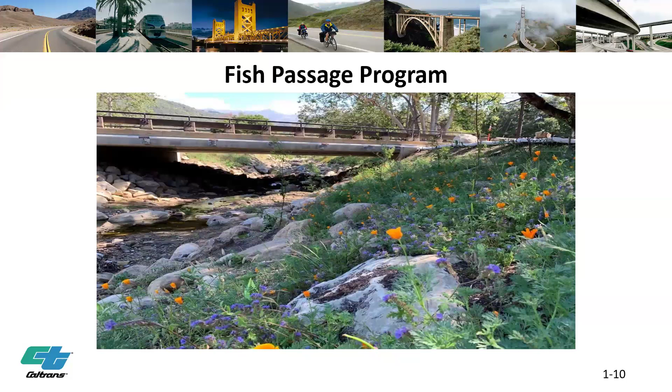Thank you. So today we're going to talk about the Fish Passage Program. Next slide please. To summarize the discussion, we'll be talking about...

The legislation that requires Caltrans to address fish passage on the state highway system. We'll talk about partnerships that were developed to prioritize and develop science and data for those fish passage barriers, how we collect that data, our engineering practices and our standard solutions, permitting efficiencies for restoration projects, funding opportunities using transportation dollars as well as federal dollars and other state and local grants, as well as the challenges and solutions to planning and delivering these projects.

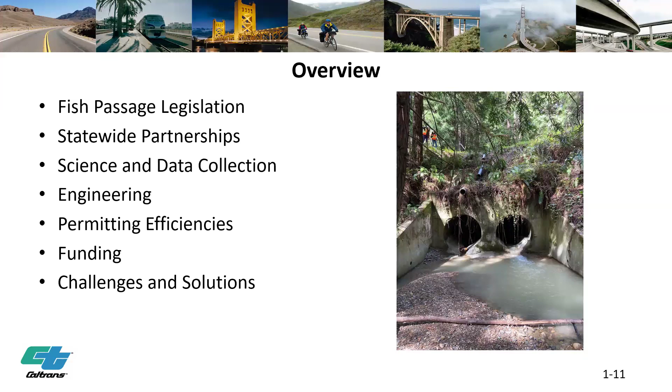Next slide please. So Streets and Highways Code 156, Senate Bill 857, that was passed in 2005 - we've been working towards the requirements of that bill for almost 20 years now. It prohibits actions that extend the service life of a barrier to salmon and steelhead on the state highway system. It requires projects not to create new barriers by construction. And there's an annual report to legislature required to show progress made annually towards identifying barriers, prioritizing them, and remediating them.

And each year, those highlighted items are priority barriers - completed remediations, projects that are active in the delivery process that are allocated, assessments taking place across the state highway system to inventory all known barriers and to obviously rule out non-barriers. And then, as I mentioned, funding for current and planned projects.

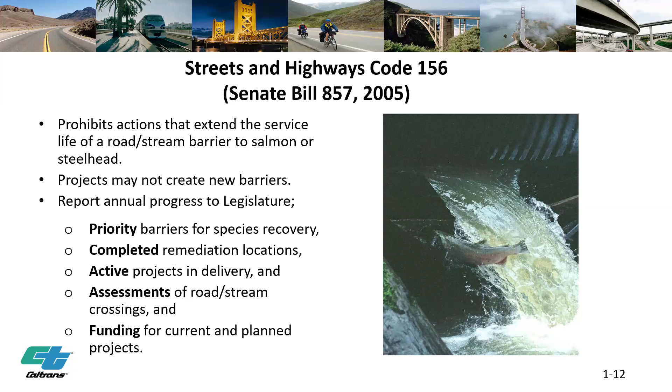Next slide please. So salmon and steelhead in California have habitat primarily along the coast and in the Sacramento Valley and the upper Sacramento Valley. Coho and Chinook salmon and steelhead trout are the 3 primary species that still exist in California. The populations have reduced significantly over the last several decades, and the map demonstrated is the range of steelhead in California because they're the best swimmers and jumpers. So their range is the broadest of all those species, which overlap within those areas. And the colors are just the distinct evolutionary populations of steelhead in California.

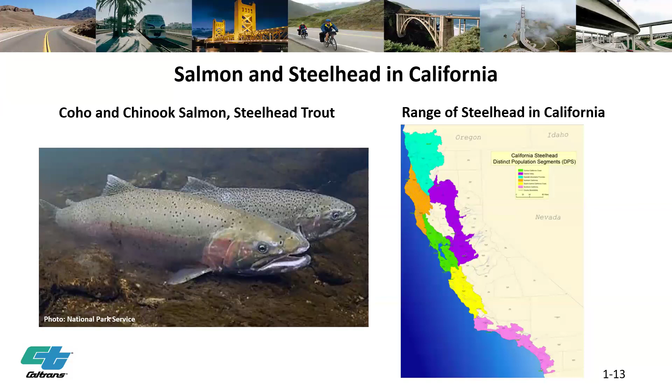Next slide please. So these photos are representative of what a salmon and steelhead barrier looks like on the state highway system. They're culverts that are perched with significant jump barriers and typically significant scour at the outlet and deposition of sediments at the inlet. And then there could be some various older artifacts on the left trying to allow elevation availability for steelhead to access upper watersheds. So sometimes there's evidence that we've tried to address in the past some salmon and steelhead barrier access issues.

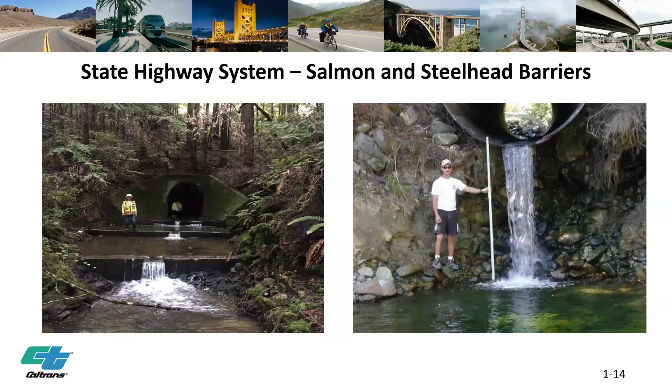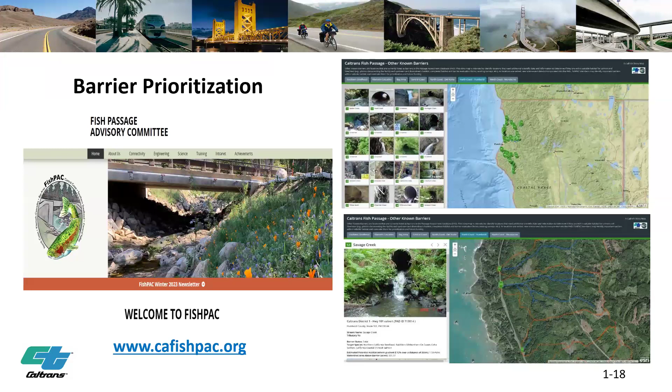So how they rank those priorities is based on species diversity. Some salmon and steelhead are endangered and others are threatened, so it's the severity of their decline in their listing. Sometimes salmon and steelhead, one or two or even all species are present just downstream of any given barrier, and that is taken into consideration. The quality and the quantity of the habitat is taken into consideration, whether or not the parameters for spawning and rearing their life cycles are available at the location, as well as water quality and availability and other conditions such as land use and other known restoration projects in the vicinity.

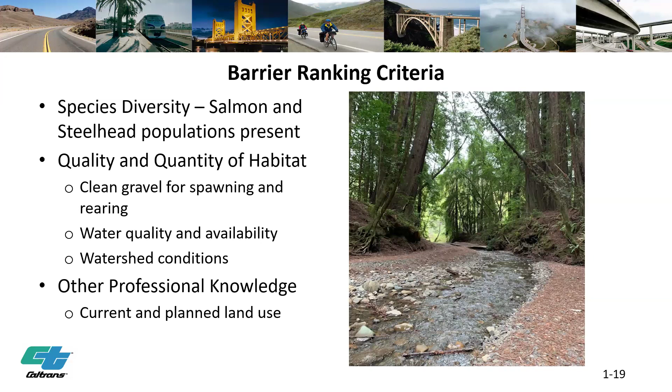The engineering work group, as I mentioned, they collaborate on guidance. Cal Fish and Wildlife has guidance, National Marine Fisheries Service has guidance, and Caltrans has guidance. So to make sure that that guidance is aligned, to the effect that our engineers are able to analyze that and understand how to get a project planned and developed and to construction. And then also it's an expert panel where anyone who has a question or an issue can bring it to that group to get the support that they need for project delivery and or post-project delivery design issues occasionally.

And then we also have, through that group, our structures division determined that they wanted to design a suite of small bridges to 65% design to reduce labor, reduce time for project delivery, and also they can use that small bridge efficiency anywhere.

It's not necessarily limited to only salmon and steelhead barriers. They've also deployed those bridges for overcrossings and other small bridges across the state. So it has brought additional efficiencies to Caltrans projects.

And also the pre-designed 12 by 12 culverts have also been developed specific to fish passage needs.

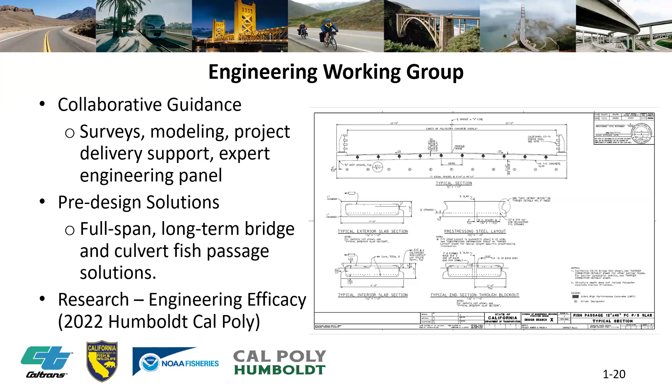As a part of those pre-designed bridges that I mentioned, in 2014 the pilot bridge was built in Siskiyou County. It's called Fort Goff Creek. That's where the corrugated metal pipe on the left was removed, and a 60-foot accelerated bridge construction, precast, pre-stressed bridge was built at that location in 1 year. So they're very efficient small bridges, and they can be built relatively quickly as well.

Since that project turned out very well, Caltrans evaluated it, and Structures was very pleased with it. Our resource partners who permit were very pleased with it. So it was determined that we would move forward with a suite of bridges from 20 to 120 feet, and any increment between those metrics for site-specific conditions. That efficiency came from this project.

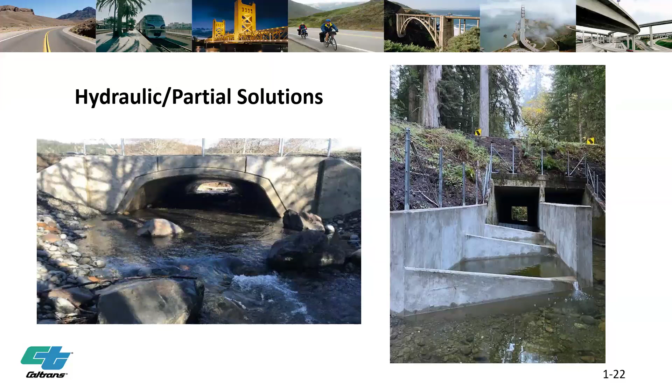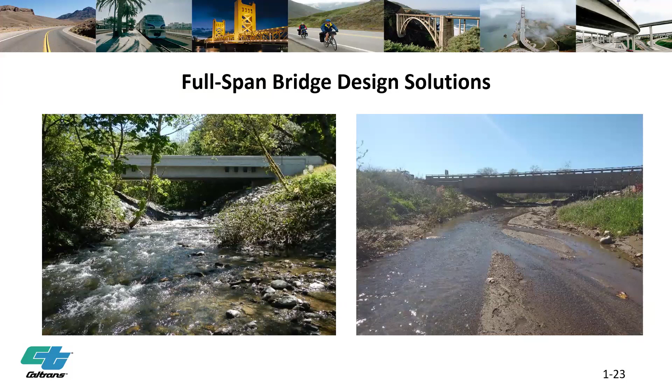The unit cost estimates for that inventory were developed using historic costs—we had been tracking historic project costs for quite some time. We escalated those historic costs, looked at projects currently in development, and categorized them by large culvert solutions, small bridges, and larger bridges. Small bridges were 20 to 60 feet in length, and larger bridges were greater than 60 feet up to 120 feet. There are some individual bridges larger than that, but their costs are complex, so we didn't cost those out, since the vast majority of salmon and steelhead barriers are within those 20 to 120 foot bridges. That's how we addressed the unit cost estimates.

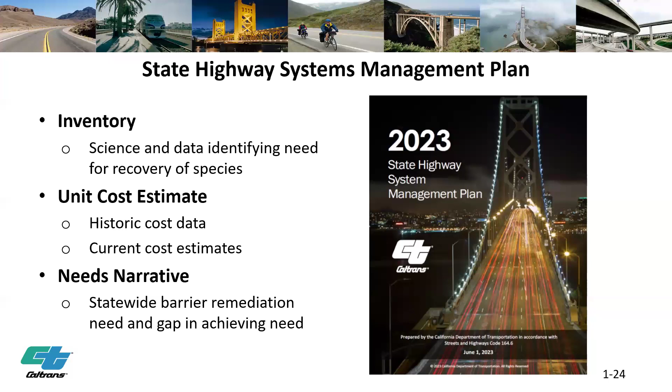As I mentioned, for funding we have 38 active barriers that are in projects right now. That's 187 miles of habitat that will be remediated by those projects, and around $310 million has been invested in those 38 projects. Almost all of them are bridges, because they're high priority locations, larger stream systems that have been blocked for the most part.

Then, as I mentioned, in 2023 we were able to acquire another $26 million from the federal government. We put together 4 proposals for funding, and 3 of those proposals were successfully awarded.

Up on the North Coast, in Mendocino County, we're building 2 small bridges in one project that was successful; they were awarded $15 million. There's another project on Humboldt 254, the Avenue of the Giants, awarded $6 million. And there's a project down in Santa Cruz called San Lorenzo Creek in Castle Rock Park, awarded another $5 million. We intend to go after that funding over the next 4 years, and we anticipate the notice of funding opportunity to come out any day now.

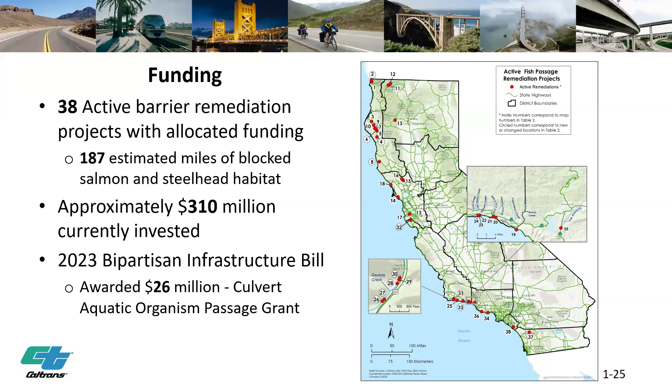We also have 27 projects in the planning phase. Developing projects in the planning phase helps us with grant opportunities as well, because we know a lot more about costs, scope, and schedule, and what we might do to remediate locations. It serves as a match for funding, since most grants I'm aware of require match funding. We actively seek those state, federal, and local opportunities, and the IIJA grants in particular are very geared towards transportation opportunities.

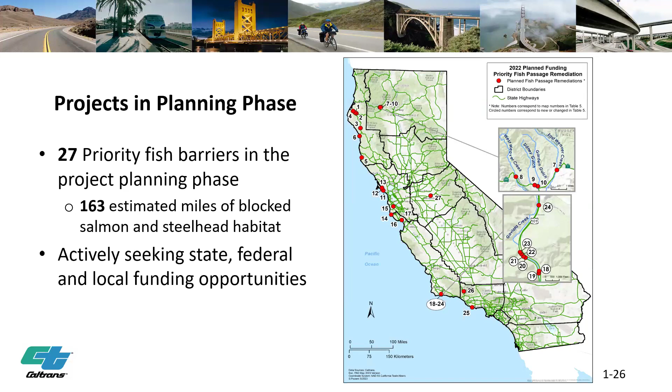I just have a few examples of other projects that have been remediated recently. Huichica Creek in Napa County, on Highway 121, was completed in 2022. Steelhead trout, coho, and Chinook salmon were all able to access 7.8 miles of habitat that was unblocked by that project.

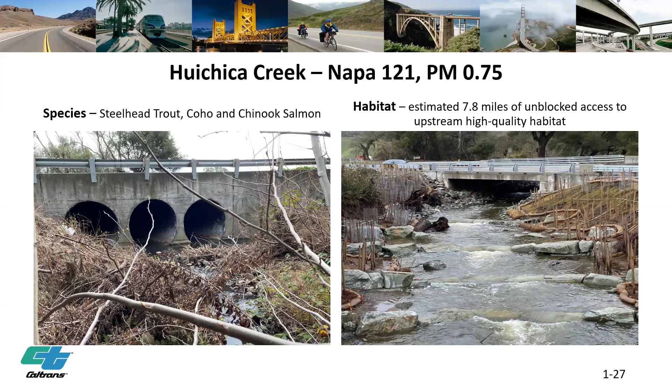Dominic Creek is up in Del Norte County, only maybe about 10 miles from the Oregon border, and 2.5 miles of habitat was made available to steelhead trout and coho salmon at this location.

When they dewatered at Dominic Creek, they found a diversity of species at that location, even within the work area—steelhead and Chinook salmon, as well as Pacific giant salamanders and tailed frogs. So these are some of the best habitats. At the Huichica Creek location, almost 7,000 fish were removed from the project area just downstream of the project during dewatering. Our priorities are locations where, if we build it, they will show up immediately. Otherwise, we would have unsuccessful projects, and we don't want that.

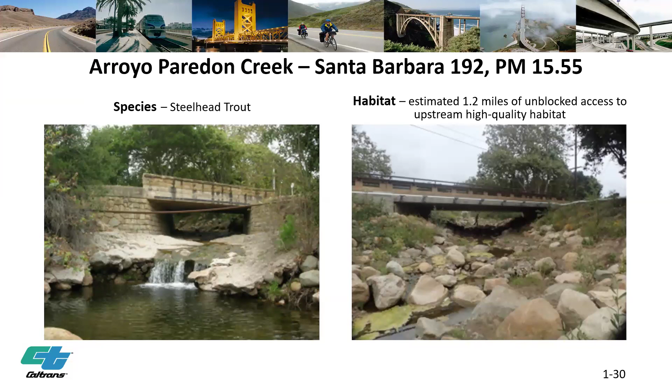Little Lost Man Creek is another example of a really great fish passage remediation project. The reinforced concrete box, the double bay reinforced concrete box, failed or was failing. So the bridge was developed. It's a 69-foot bridge. As I mentioned, I am the Office Chief of Fish and Wildlife Connectivity.

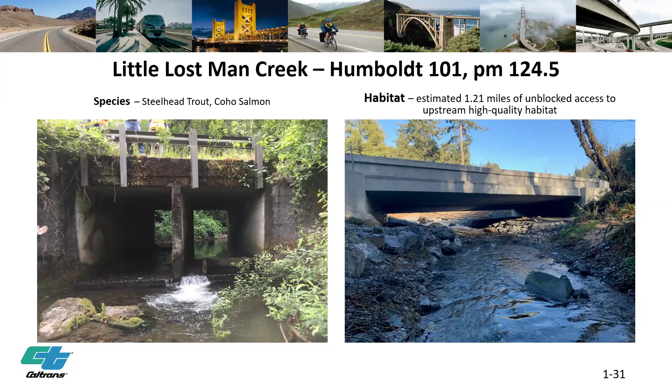And so for most of these full span solutions, we also have wildlife connectivity use. We deploy cameras at all of these locations. At Little Lost Man, you'll see the very large bear on the left that utilized this undercrossing. That explains the Little Lost Man. And then on the right, there's an elk using the undercrossing as well.

And so for the new wildlife law that passed last year, which I'm not necessarily here to talk about, these are going to satisfy some of those requirements as well because of the wildlife connectivity opportunities.

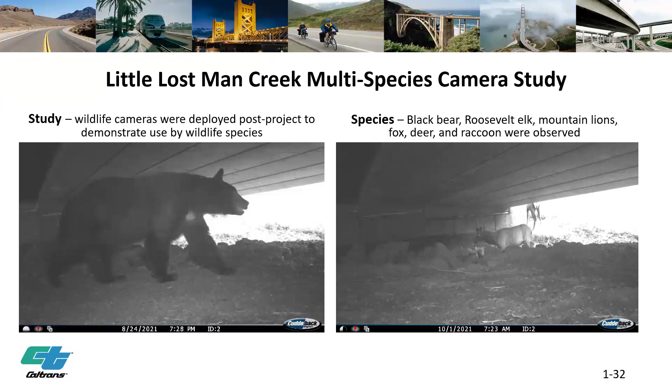So, challenges and solutions. We have a lot of challenges, and we work hard to determine how to be more efficient, how to reduce costs. Some of those opportunities are through the pre-design that I mentioned, and it reduces the project design time and cost efficiencies.

And those defined actions, because we know what we're planning to do, we can translate that into programmatic permits. We can explain to the agencies what we're going to do on certain projects so that they almost pre-agree with those types of methodologies. And it can turn an endangered species consultation from 6 months to 60 to 90 days, so half or even less than half the amount of time.

Some other permitting efficiencies, we're engaged in a programmatic consultation right now with the National Marine Fisheries Service and the U.S. Fish and Wildlife Service to expedite permitting on salmon and steelhead remediation projects.

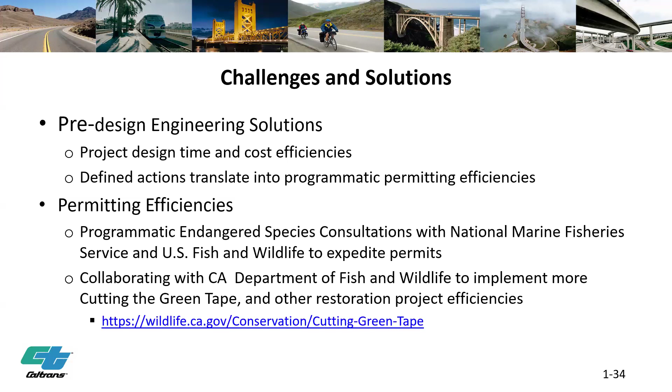There's even more challenges and solutions. So funding and costs. We've been evaluating state, federal, and local grant funding opportunities so we can cost share more for those projects.

And then the design and permitting efficiencies that also reduced our schedules and our labor costs. Those are translating more and more into projects because they were only developed in 2020. So a lot of the projects that were in development were not using those, they were too far along. But now they're starting to really implement many more of those in the new projects that are being planned and developed.

And then hydraulic engineering guidance. It's actually harder to build a partial solution than it is a full span solution, because there's a lot more consideration of what the water will do if it doesn't have enough space. So we've been working collaboratively within the engineering work group to try to better align Cal Fish and Wildlife's, National Marine Fisheries Service's, and Caltrans' design guidance for hydraulic engineers, because it's counterintuitive, but the smaller solutions are harder to design.

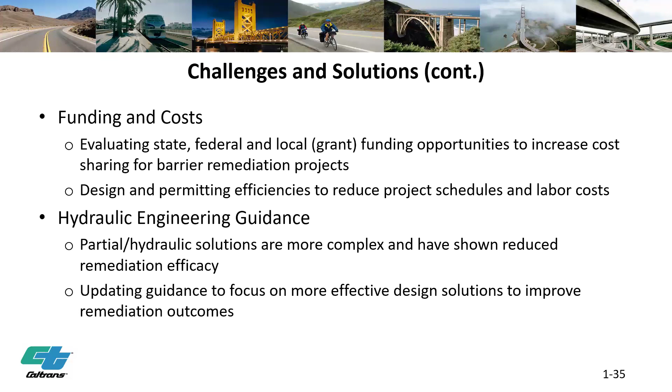That was all I had. I appreciate everyone's time today.

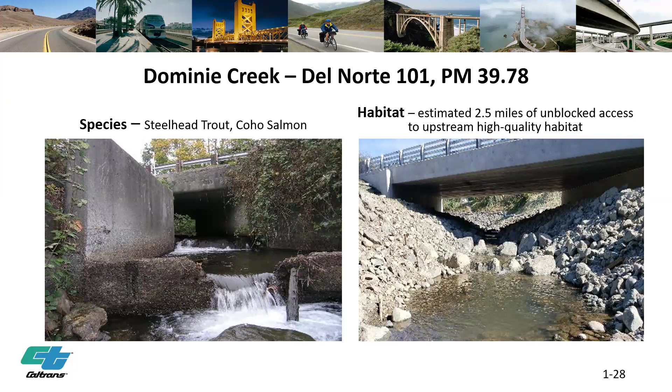The engineering work group meets monthly, and it's continuous, I don't intend to disband it. I helped to initiate it, and I facilitate it. I'm not an engineer, but I facilitate the engineering discussion, and I enjoy it, so I think I'll continue to do it. A lot of good information and education does come out of that.

I think right now, and it's not a challenge that I listed on a slide, but there's been so much turnover and so many new staff. I think a challenge is educating staff that when they approach permitting entities and when they are planning a project, they start by saying this is a restoration project, because oftentimes when Caltrans engages state and federal resource partners, their first thought is mitigation. And even I hear too many times that Caltrans isn't afforded the same permitting efficiencies as other restoration partners like Caltrout, or some see us as orange and them as green for some reason. So I think more education is needed about the fact that we are doing restoration projects.

And I would also contend that some of our bridge replacement projects that aren't fish passage projects are betterments, because we're taking bent walls out of the channel, we're spanning rivers and streams more. So I think how we approach the project when we first engage and initiate with partners, we need to start by saying this is a restoration project, and permitting efficiencies should be on the table for us, not talking about the mitigation word, which I call the M word, because the entire project itself is a betterment. So that's one of the things we need to work on, educating our partners and getting better at this. The more we do it, the better we'll get. I don't know if I answered your question.

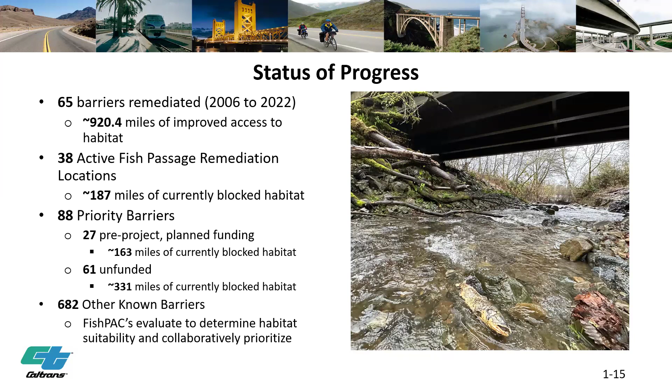And I hope you know, I love those bridges, and I love the before and after pictures of what we're doing. The added treat for us all is that now they're also multi-purpose. Now we can ride bikes and look at all the beautiful landscape, and we're saving the fish. So I love all of that.

I'm just hoping we can get to that place where you're talking about educating everyone: let's plan for it, let's make sure we're doing all of these things and saying this is what it's going to cost. It's going to cost $20 bazillion, so let's just put it out there. You have to keep coming back for it, right?

I think for those locations that are not as important for recovery, some of the stream simulation design solutions, where we can span the majority of the wetted channel and allow for the natural stream bed but maybe not span the entire channel, might work, because during that time of year when it wouldn't likely be accessible, it might not be as important for that system. So when we get lower in the list of importance, I think some of those lesser solutions may be more reasonable and feasible. But that's too many, 200 years from now.

Speaking to that, I'll be gone, I'll be out of here. That's if we remediate 4 locations a year, which was our average for quite a bit of time.

But if we remediate more like 10 or 14 locations a year, we're looking at 40 to 50 years.

Do we have other questions or comments from staff or commission?

I guess just for clarity, my earlier question, and again this is part of my learning process: how often do projects that come before the commission involve fish barriers that have to be mitigated as part of the project, and so then they're paid for by the applicant? Does that come up? I know you're talking about independently dealing with these barriers, but I'm curious how often they're dealt with as part of the process of dealing with larger projects.

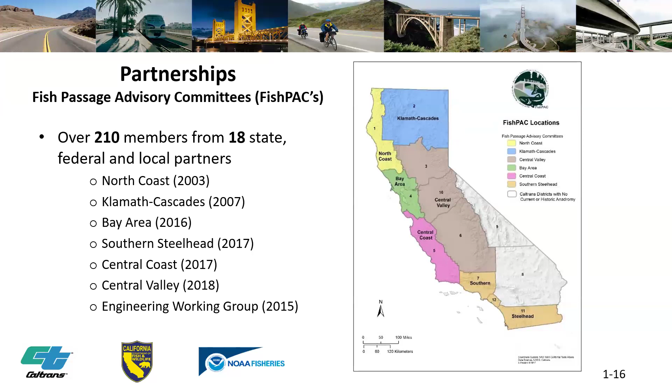Great, thank you. From this slide, if we move forward to 1-21, there's a bridge we see from this angle where the past chair Eager asked if bike and ped could cross that. You said yes. I can't tell if that's a bridge that also accommodates vehicles other than bike ped, or if it's narrower than that. It does have shoulders and sidewalks on it. It was brought to standard in 2014, but it's in a very rural area, right next to a campground. So it's a very rural two lanes. I think it has 8-foot shoulders on it, and I'm not sure if it has sidewalks because there's just not a lot of pedestrians there.

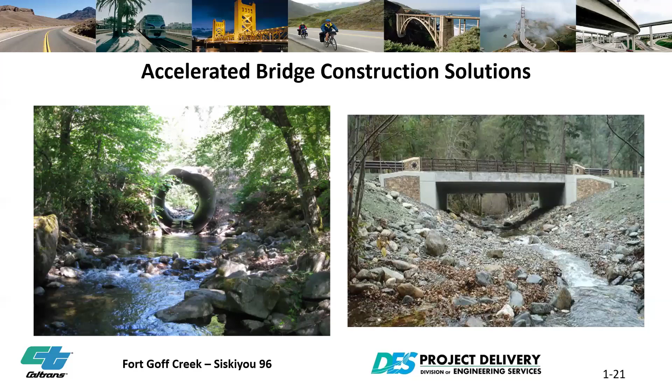Thank you. From staff or commissioners, questions, comments? Melinda, any closing remarks? I just thank you for your time today and all your great questions, and that this is something that you care about.

Thank you. As our executive director mentioned, this hearing tomorrow and the next day of our commission has 163 book items, about 1,500 pages of material. We would never have been able to invest a full hour on this one topic, so I'm so glad we're doing this. Thank you again to our team for teeing up the opportunity for Melinda to educate us more fully, as well as our stakeholders. And we still have two really important reports to go through as well.

If I could just say, I appreciate—sorry, I just happened to ask the question, what's up with the fish passages? This was much more than I had expected, so thank you so much.

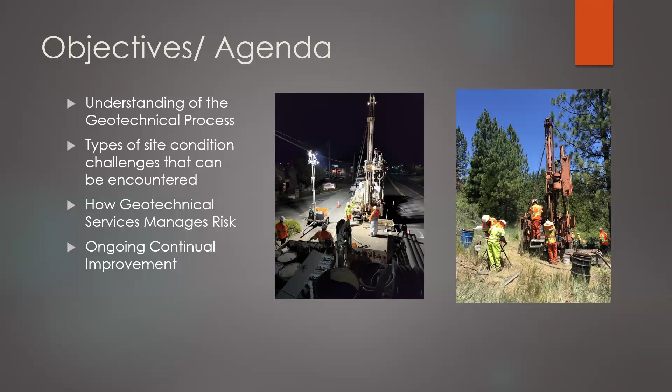Next slide. So the first thing when we get a project and we're asked to perform a site investigation is we'll do what we call a desktop site investigation plan. Basically this entails reviewing everything that we can find that's existing, including maps from the U.S. Geological Survey, which is a huge resource for us. We can also look at existing literature with regards to the site.

We will also do a site visit, take a look at the geology, take a look at where the best places to perhaps take a boring are, and what are some geologic or site-specific constraints that we may encounter. We also look at what's called a log of test borings, if this is an existing structure. Caltrans Geotechnical Services has a database of existing and previous projects, so we can look at a previous alignment and maybe a log of test borings that was done years ago initially. We'll use that and take a look at other reports that we have at our disposal.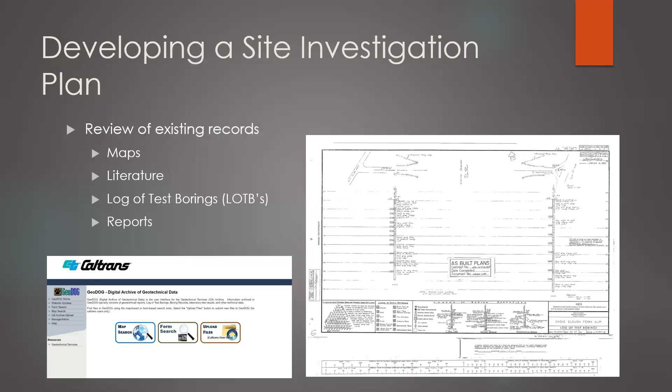Next slide, please. Now I'm going to focus a little bit on borings, because borings are one of the main ways that we're able to characterize the ground. There are a couple other ways, which I'll discuss in some subsequent slides. One of the big things we're going to try to determine is the number of borings, the locations of the borings, and the depths of those borings. And so we use a lot of guidance as a starting point.

The first place that we will look is the AASHTO guidance. Under the bridge design specifications, section 10.4.2, subsurface exploration, for different types of structures, this document, which is used by all DOT states that are part of AASHTO, gives a recommended number of borings for the type of structure and a basic depth. We'll also take a look at USGS maps and existing information that we have on that site to determine depths as well, as I stated previously.

Now, we also have internal guidance at Caltrans Geotechnical Services that gives us further guidelines with regards to how we plan the borings. We do take into account when there are site-specific limitations, and sometimes those risks do pay off for us, and sometimes they don't. For instance, for a sound wall in a very homogeneous area, we may not take as many borings, and that's something we do quite frequently. But in some instances where we're running into environmental issues or environmental clearance issues, we may not be able to take the number of borings we originally anticipated, and then we have to take a risk and maybe decrease the number of borings and do some interpolation on our end.

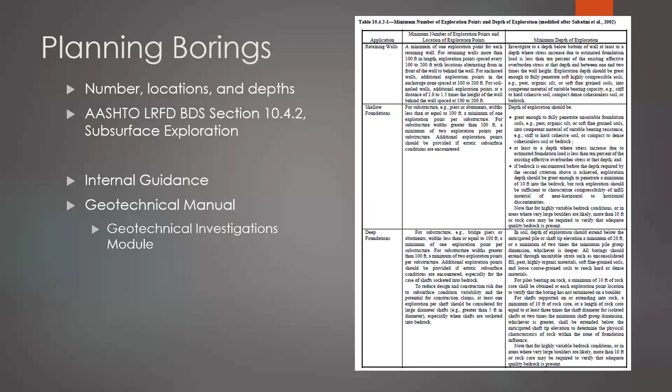That triggers the site investigation plan, the initial one I referred to on slide 3. Once Caltrans does the site investigation plan, we determine the type of investigation needed and the layout of these planned borings. We'll also plan the types and locations of tests we're going to do. Our geoprofessionals will determine access routes, check for utilities, basically what the site looks like.

Once they do that, we move on to the site assessment questionnaire, which we put together for our district partners. This box probably takes the longest time. This is where we look at trying to obtain our environmental permits and getting our right-of-way clearances. Sometimes we aren't able to take borings in our immediate right-of-way, so we need to work with our right-of-way agents and Caltrans to get that completed. Depending on the location, we're dealing with several different agencies that may need to give us environmental permits.

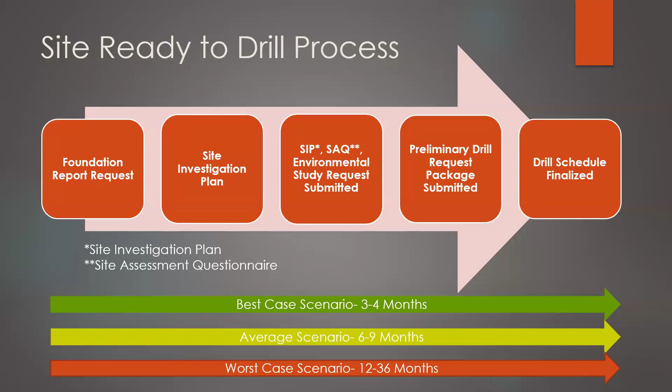Some of the projects that have come to the CTC have very different site conditions right next to each other. You can have sand right next to an igneous rock. So that's the trick, and it's one of the things we in geotech try to plan for, and if we can't, we try to make sure we're identifying those as risks.

I did also mention that we do drilled borings. We also have cone penetrometer testing, where we take a cone and a rod and push it into the ground. It can give us an idea of the type of soil we're running into below that location. It has different limitations though than borings and probably can't go as deep.

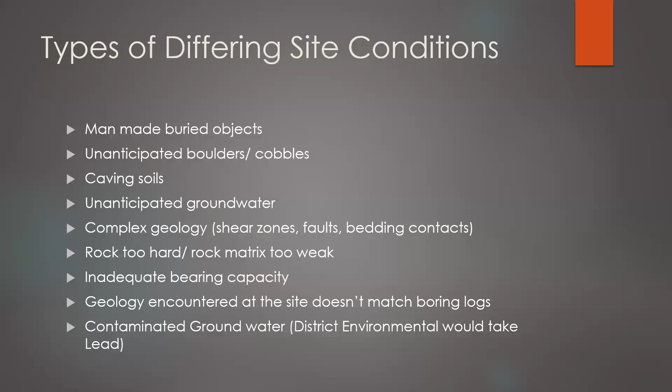Okay, next slide. So when...

When we're managing risk on a project from a geotechnical standpoint, a lot of it has to do with cost and time. For instance, drilling takes time to get the permits, and it could take time to do the drilling operation itself. Depending on the type of geology we're drilling through, it could take 2 to 3 or 2 to 4 days to do one boring. If it's very soft material, we might be able to do it in 1 day. It also depends on how far down and how deep we're doing those borings. We're also looking at cost to mobilize a drill rig, have a certified inspector on site, traffic control, and everything required to get a drill rig out there. We're looking at around $200,000 a week for a crew to get 3 borings. Sometimes that does play into the decisions made by the project development team.

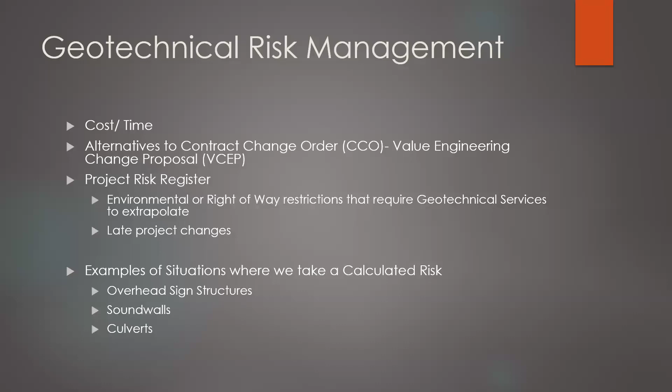I do want to make sure I address the continual improvement that geotech services is undergoing. We try to learn from what's happened in the past. One thing we've implemented in our organization is a quality management system based on ISO 9001. Part of that requires us to make sure all of our processes are documented, reviewed on a regular basis, and updated regularly. It also requires us to perform lessons learned and root cause analysis when projects don't go quite the way we thought, so we can learn from them.

Some of the things we've updated — our guidance is broken up into chapters, or modules. We have chapters on how to evaluate dewatering, for geotechnical professionals, or how to deal with and identify collapsible soils. If we have structures below grade, there are considerations an engineer needs to look at when planning these projects. These are just a small example of some of the modules we've recently updated based on lessons learned from projects.

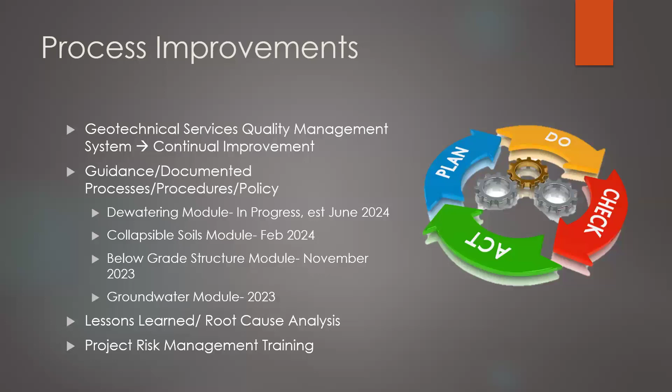I'm available to take any questions and have any further discussion if you'd like. Nina, thank you for joining us today and for the excellent presentation. We will do the same in terms of comments and questions.

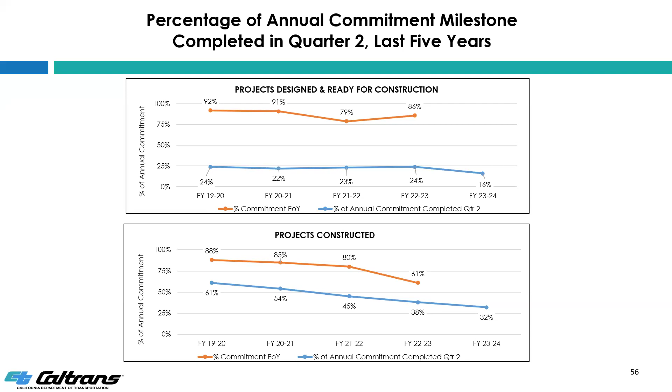Before I get into the bidding environment, the next thing: any questions on our deliveries? I do have a question.

So as you're doing this analysis of how we're doing this year compared to years past, are the CMGC contracts, are you looking at whether they're doing better now that we're using more of those? Or does that fall into any of these categories of, jury's still out? No.

So for CMGCs, we use the same milestones, but the procurement process is a little bit different. So you can do your early work packages, which gets some of that work out on the street earlier than expected.

I don't have all of the data on it, but I believe what we've seen in terms of the completion of those CMGC projects is that they're hitting their schedules. So for the limited amount that we've got on them in terms of schedule, I think they're doing okay.

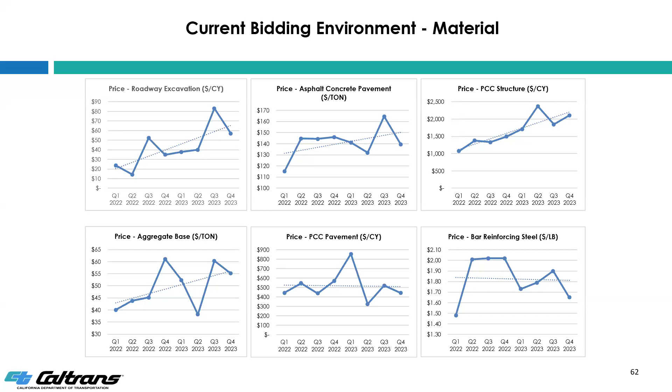It's related to delivering in the fourth quarter, and you bring up a really good point about the timing of when the engineer's estimate is done as compared to when the project is advertised. If you could go back to the slide, sorry, Brandy. Go to Jeff's slide five. Actually, no, go to slide 6.

Are you guys doing anything internally to try to adjust for that? Because when you have that many projects being delivered late, to get them out on the street for advertisement, it does take a while, doesn't it? And we'll share our microphone.

Just have a conversation, we can put it between us and lean in. Appreciate the question, Tim.